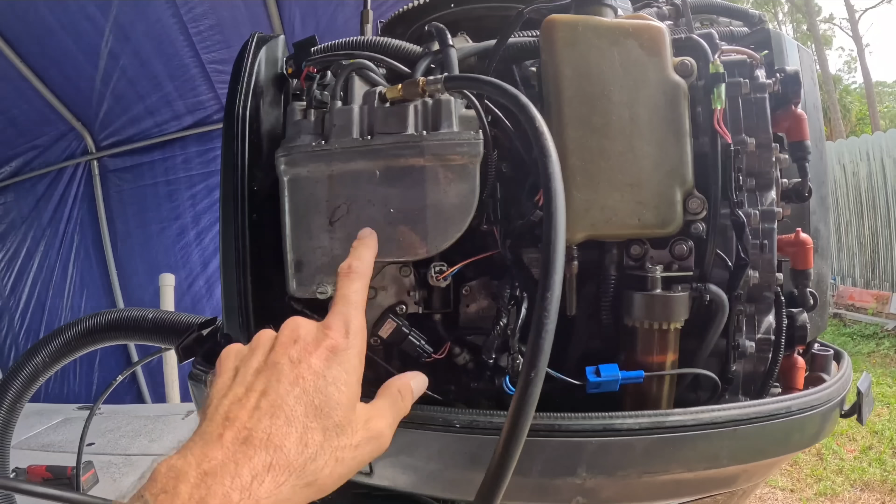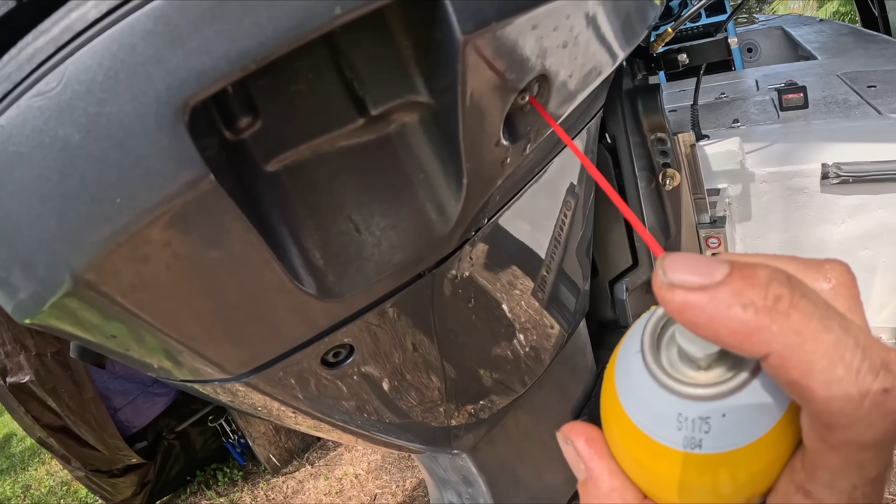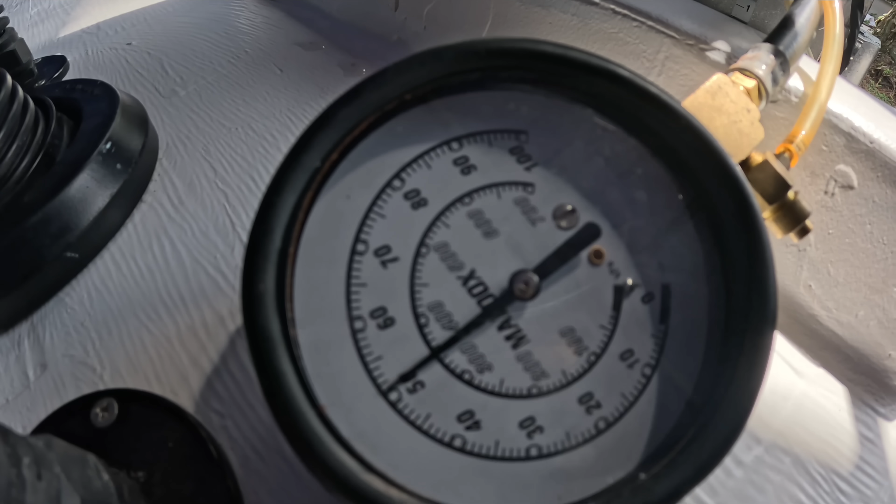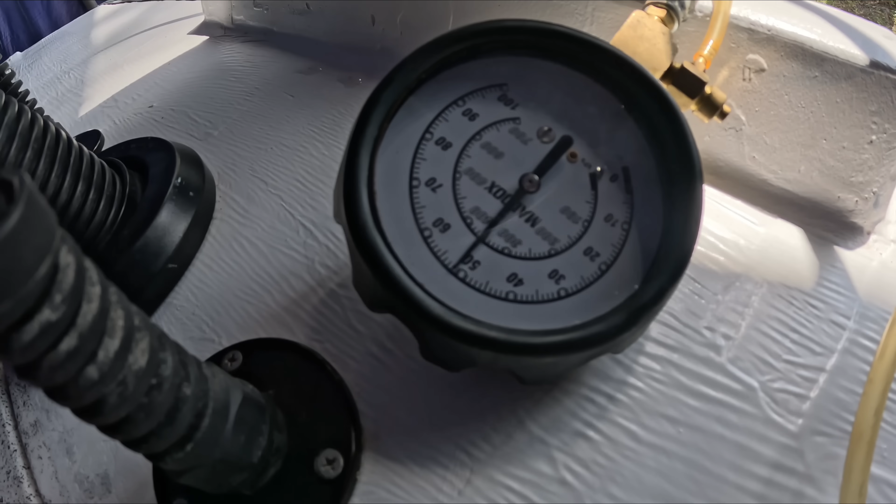So I'm gonna check fuel pressure, and then I probably have to change at minimum the VST filter and this filter and then this high pressure filter. Oh. Now if your little pisser is clogged, George Jetson's secret right here. Oh yeah. Alright, I got it hooked up. I got it where it's coming right out of the VST. Huh?

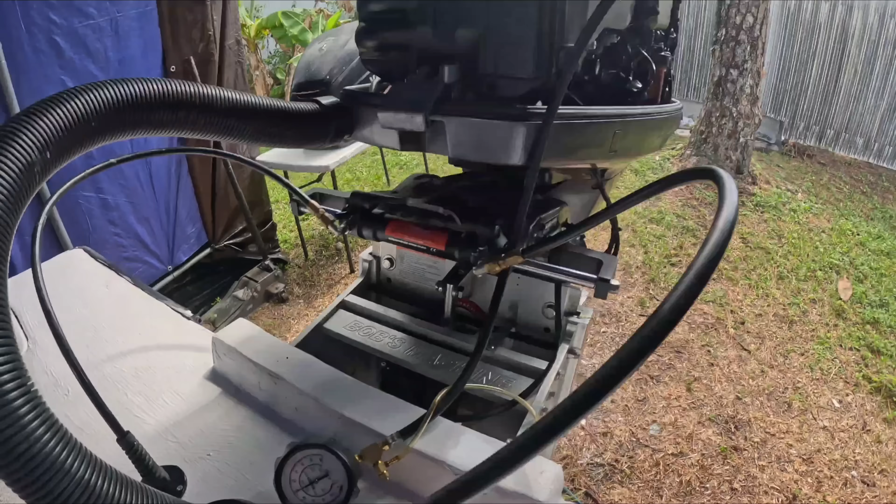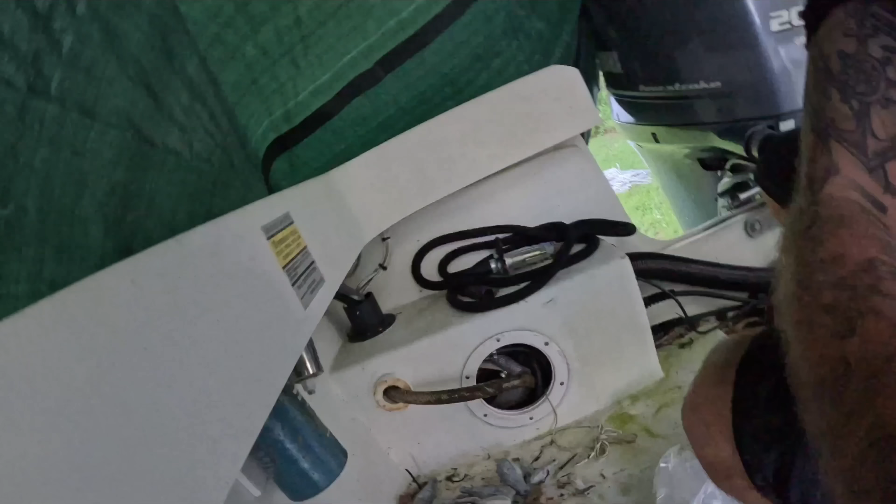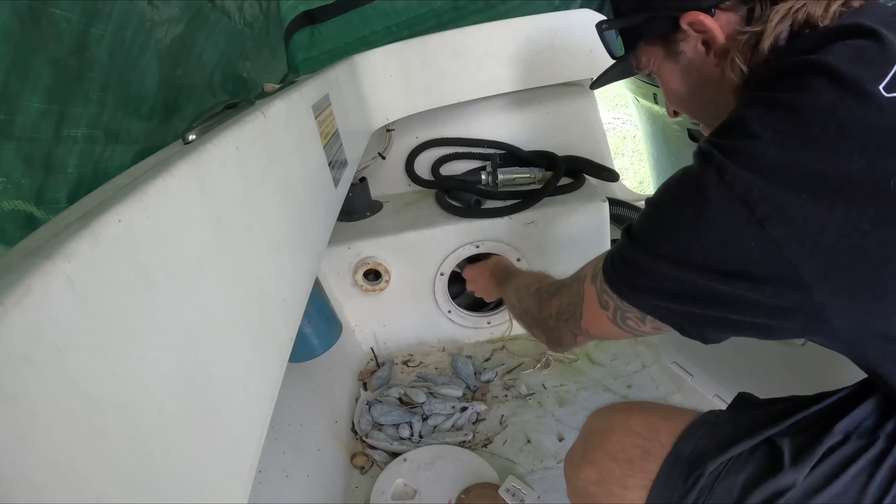All right, well, we just got a delivery for the hatch for that Parker. So this is the smallest one that I could find. Let's go see if it'll fit. Oh man, I really hope so. It's beautiful, guys. It's gonna just fit. Alright, I don't know if I feel like getting itchy from fiberglass right now, but that'll be a morning project if I don't get to it later.

I'm gonna go plug my computer in my boat. This is the greatest thing for any outboard diagnostics. They literally have it for every single outboard. Good stuff. Hope I figure something out.

I'm gonna check the real high fuel pressure in these. These motors have a VST pump, they have low pressure diaphragm pumps, and then they have this big belt driven pump, and there's a sensor on there, so I should be able to see what the pressure is at idle. And I'm gonna check a few other things on it because I've never plugged into it since owning this motor, which probably I should have before I bought it. What do I know?

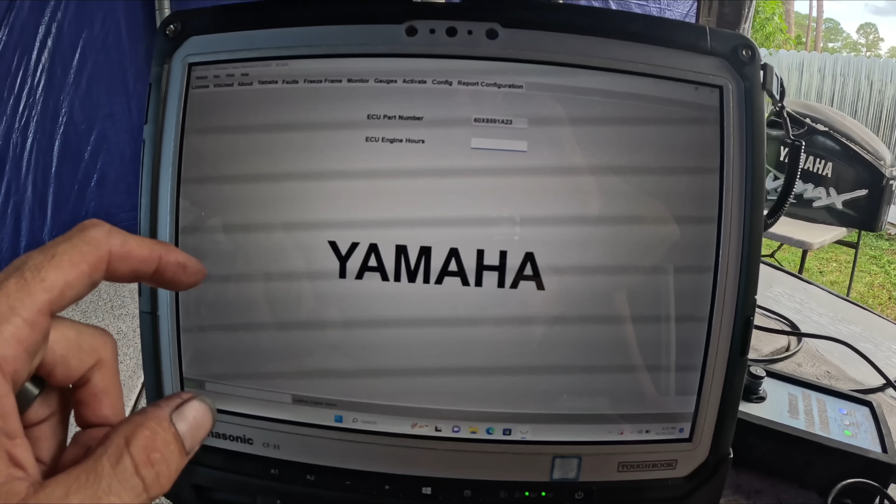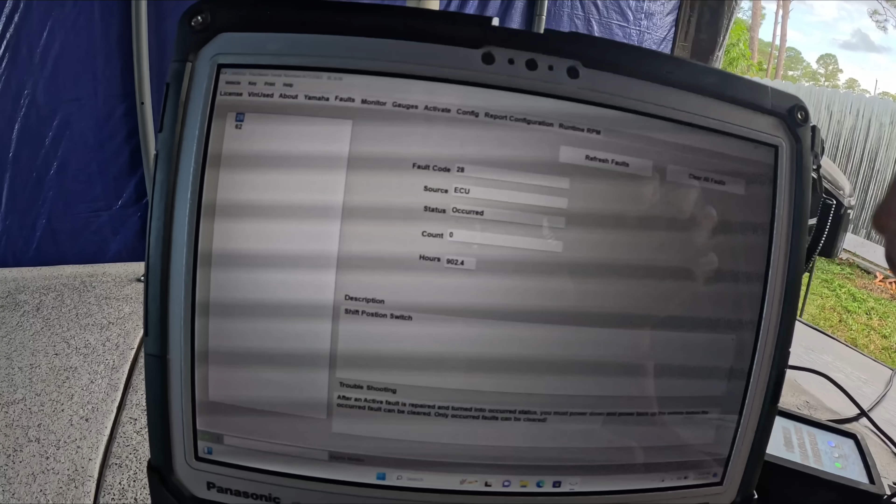Dang, 943 hours. All right, let's see. Faults. Nothing here. Let's go to monitor.

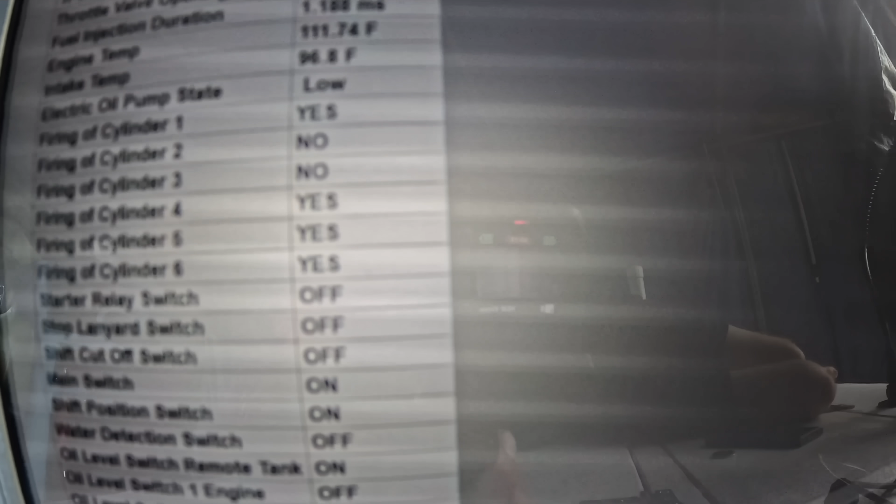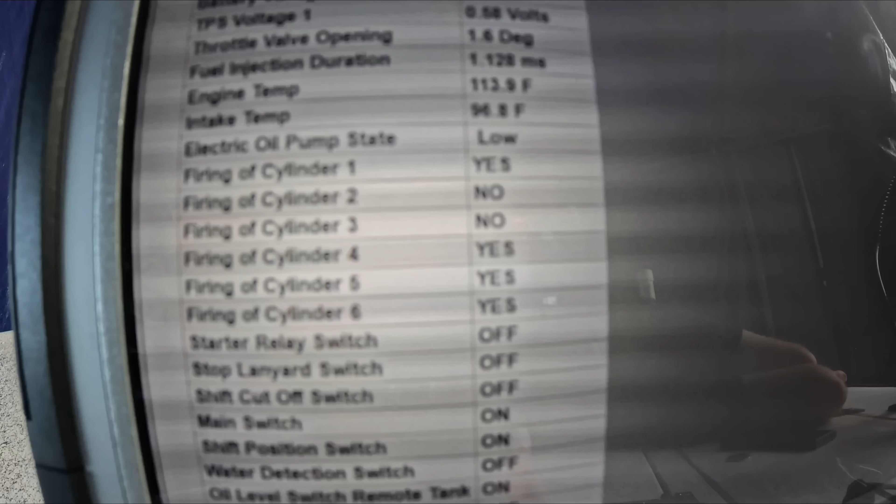I know it's probably pretty hard to read the computer through the GoPro, but when I'm in neutral, these motors have shift position switches and it keeps off cylinders, I think 2 and 3 or something like that. It has 2 cylinders off. And when I go into gear, sometimes they're off, sometimes they're on, and it's intermittent.

So I'm gonna do some research and see maybe I could just bypass it, because I don't care. It's my boat. That would be a beautiful thing. But yeah, hopefully that's just it. I should probably still do fuel filters, and hopefully the next sea trial I'm gonna get a nice speed test out of her, or it'll blow up.

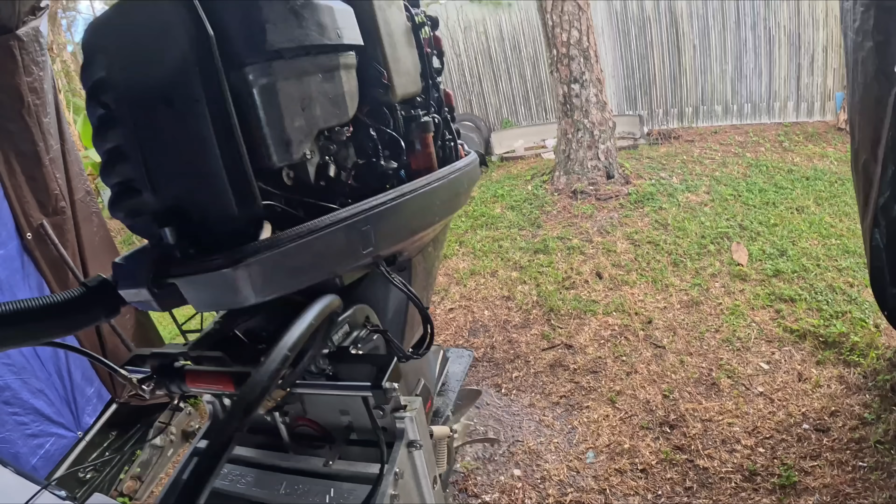She has a lot of idle time. It's crazy.